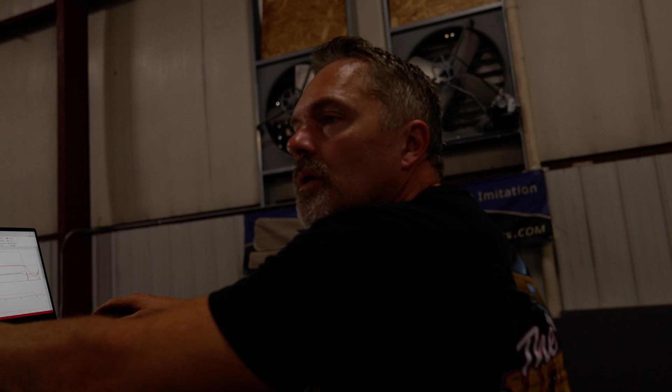So it just hit the three-step right there, looks like. What we're listening for too is a two-step and a three-step. Don't ask me why they name it that way, but the three-step comes before the two-step. You'd think it'd be like a one-step, but it's not - they call it a three-step. So we'll see where that's at.

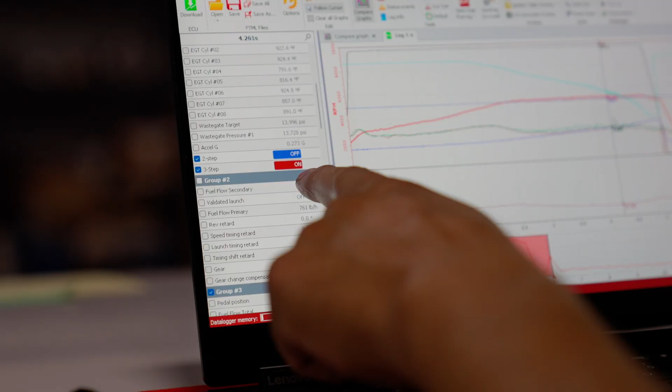Three-step - oh no, it had not turned off. Okay, had not turned off. Also kind of working on tune-up stuff here. So the three-step is on the whole time. Where is that at? Oh, that's all the way up here. And the two-step never came on. So the whole time it was there, it was on the three-step because it did not hit my three-step criteria to turn it to the two-step.

So currently it needs to go to 12 for here - I just wanted to test it at 12 psi on two-step. So two-step rev limiter is 4800 RPM. Two-step boost, two-step target is 12 psi. The three-step target is 14 psi. And we go over here, three-step enabled until 14 psi. So it never made 14 psi, so it never was getting there. Okay, but it did get really rich.

So let's see here, I think we'll go in. I'll just kind of work on this tune-up still, trying to get this thing better and better and better. It started going rich right here at the very end, so it's taking a whole bunch of timing out of it - in fact it's down to 0 degrees of timing right there. So it's going to start building boost faster, but it also threw probably a little too much fuel at it, and it got unhappy.

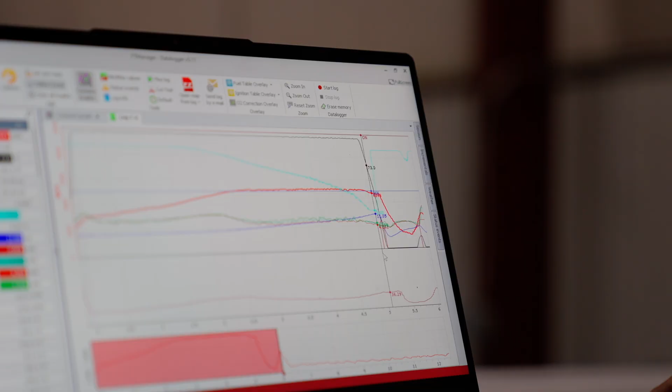So right in that range, I need to change my AFR. I'd like to get it back up into something a little leaner here, 4 or 5 or so. So I'm gonna go in there, make a couple changes, and then we'll come back - we're definitely gonna have to hit it again in the upcoming video, engine dyno for Raymond Hall.

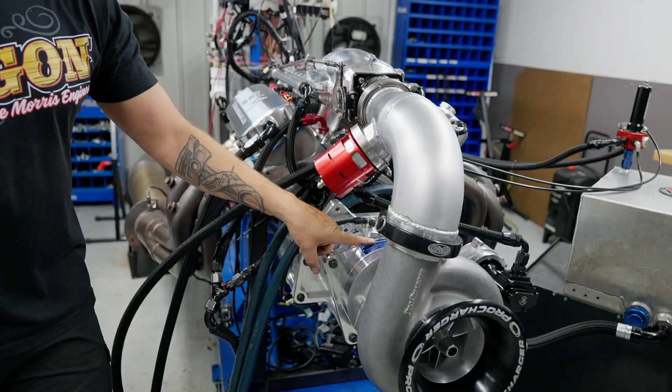Now this one was a little bit interesting - big block Chevrolet, methanol, F3136. Ray built this engine using some of our parts himself as a gasoline engine because he was going to make something a lot smaller apparently. So what he did is he sent us the long block back, brand new, fresh, never been run, to convert it into a bigger methanol engine. We'll go over more of that build and all the dyno results on this engine in the upcoming video.

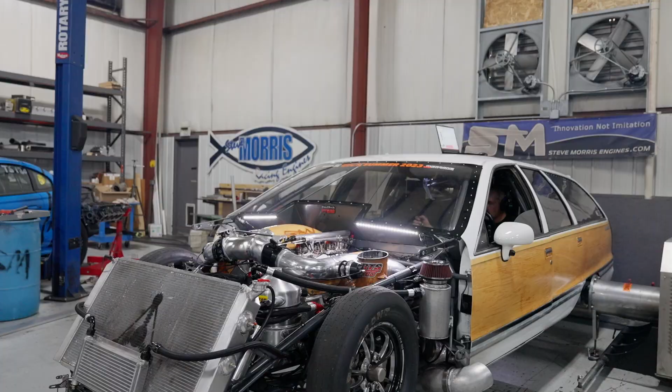Alright, that did not go as well as I was hoping. Something changed right there, and I gotta figure out what the heck is going on. It came off the three-step, and then when it hit the two-step, it actually just slowed down. It just started going backwards. So let's see what is happening there.

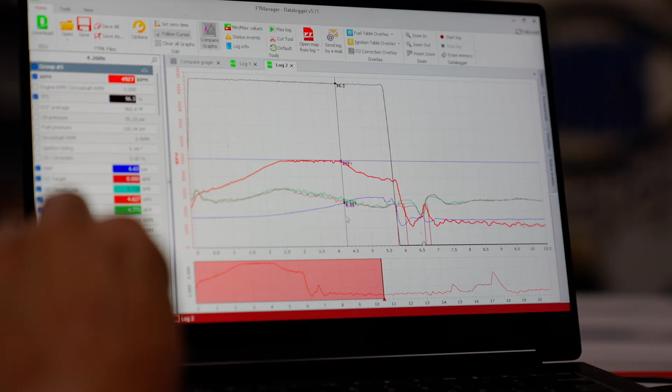Okay, so like I said, didn't go as I had planned. The same thing came up on two or three step - it was missing, or acting not normal. I got two things going on here. The primary thing is all of a sudden, as soon as it built - let me get rid of this stuff real quick - it built, as soon as it got up in the 7 pounds of boost, which is nothing, I don't think that has anything to do with it. All of a sudden, the engine RPM just started going backwards.

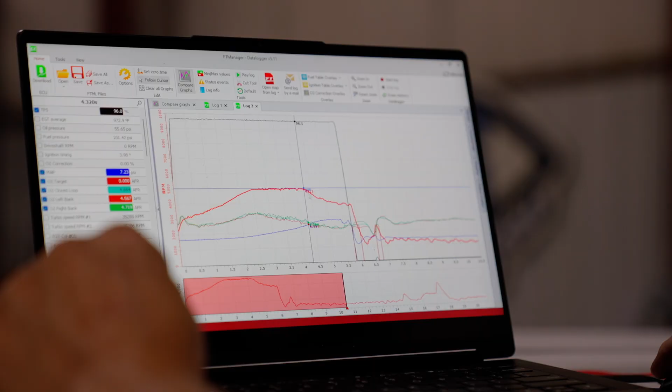The tune-up is looking correct. It continued to build a little bit of boost, but then all my EGTs look correct. I'm almost thinking that's the first thing - I'm wondering if it has done something in the converter that's all of a sudden it's just not right.

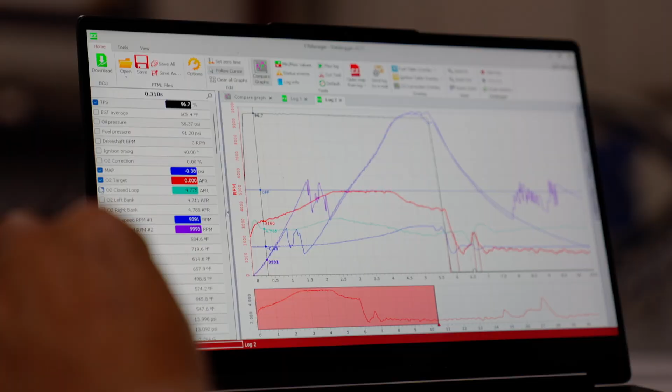Unfortunately, the only way we can test that is just by physically testing it. The second thing I see going on is that the turbos take off, and these lines here are the turbo speed sensors. Right here, this is boost. This flat line is where it just isn't building boost very fast at all.

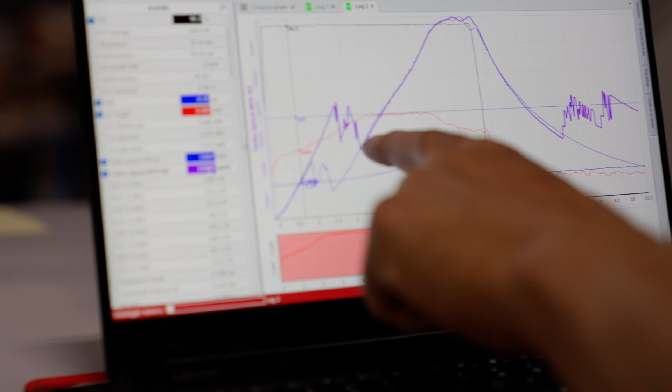Just not enough timing, huh? See how the speed sensors here, it actually takes off, then slows down, then takes back off again, and they run parallel with each other from the start to 1 second in, and then something happens where they get all angry. This one starts out, it stalls, comes back in way down there. This one stalls, does something, and they both catch up, and then they both take off again.

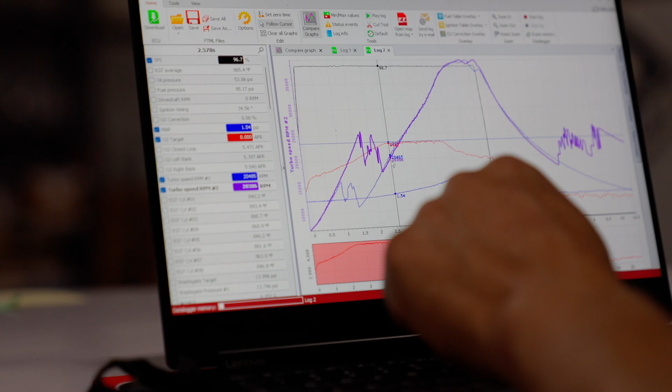I've seen that now just a few times, so I'm gonna have to start figuring out what's going on there. I'm gonna talk to Hartz and see if there's some kind of issue, and I think I'll probably run this one more time, change my tune-up just a little bit, and see if it repeats that or what's going on, and then might just end up having to pull that converter.

But that's what we test for. We're gonna test right here and see if it makes it past this, then see if it makes it past going through pulls, and then see if it goes down the track and everything stays intact and is right and correct. I'm gonna change some stuff around in my tune-up just a little bit and see if it does that all over again.

Alrighty, there it stayed on the rev limiter. So got up there decent. Didn't build any boost. This thing with the turbos dropping and coming back, I don't know what's going on there.

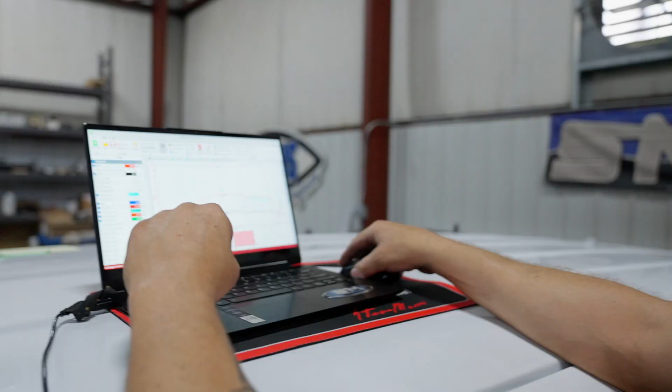So that was from the moment it hit the two-step. It was a little lazy getting to the two-step, about 2.5 seconds. But I think that's just because the air is really bad right now, and it was richer. But it jumped right up, and it was on the 3-step. So let me show you that 3-step. The 3-step is this red line way up here, and it turns off right here where the engine RPM goes down. So from the moment it hit the limiter in this area, basically 3 seconds, 2.5 to 3 seconds, it was only on the rev limiter for 1.5 seconds before it built full boost, and then it drops down in engine RPM to what I want my launch RPM to be, and then it just maintains there.

So that was all really good, actually. That's probably one of the best. Once it got to the 2-step and then made boost, that was the best time there. I'm going to work a little bit more on getting up to the rev limiter. I'd like it to be quicker than that, like 1.5 seconds or so. And then if it was 1.5 seconds and then 1.5 seconds, boy, that'd only be 3 seconds to full boost where I bump in. Right here, I would have bumped in at 4 seconds, and this probably would be a little bit quicker because this is stone cold for the morning.

So after burnout, transmission fluid's a little bit higher. It's not even 150 right now, so that's pretty good. I think we got that figured out. It was all a matter of figuring out the perfect timing and the perfect amount of fuel once it hits the rev limiter. I think I'm still rich going to the rev limiter, but once it's on the rev limiter, I think my AFR is correct. So I think we are

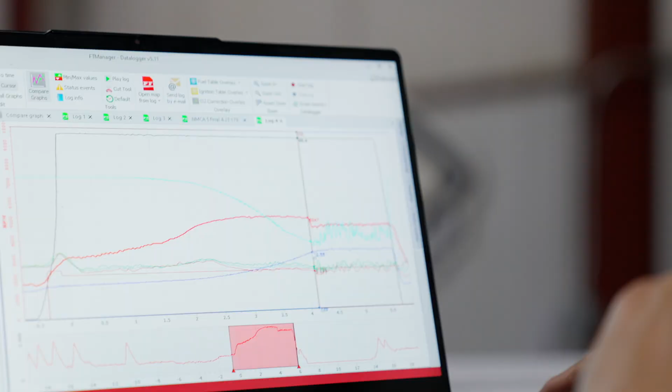Yeah, so we're pretty darn good right there. So 2-step accomplished, wasn't a converter issue going down. It's pretty interesting, this thing goes all the way down to 2 degrees of timing to start building boost, and that's good, except if it goes to 0 degrees of timing on this particular combination, this engine, and that's what I was dealing with yesterday, when it goes down to 0 degrees of timing to build exhaust temperature. If you don't understand what's going on there, sorry. If you do, I'm just going to explain this real quick.

So in order to get the turbos to spool, this is on pretty much any car at lower RPM, with great big turbos, you need to typically overgeneralize - add some fuel and take a whole bunch of timing out of it, because the less amount of timing you have under what the engine needs makes the exhaust very hot. Very hot exhaust flows very fast, and very fast hot exhaust moves turbos quicker. So you take timing out of it and add a little bit of fuel, and it makes the turbo spin faster, quicker. That's what we've done.

So it's just that magic spot, but for some reason this combination, when it hits 0 degrees of timing, the engine - whether it's making boost or not - just is so unhappy it starts losing engine RPM. But at 2 degrees of timing, it's fine. Kind of weird. So anyways, happy with that. I think that's actually fixed. I like that.

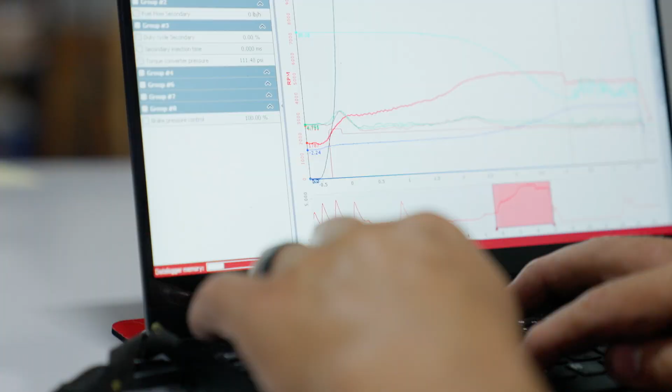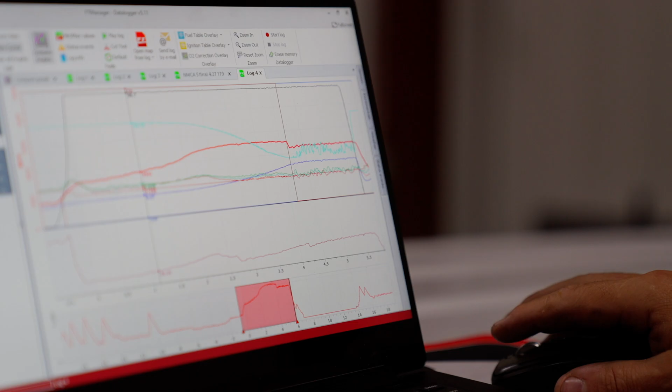Let's see. Ding. Yeah, so that all looks really good. Okay, so all our converter pressures, everything looks real good through there, and we met target, did everything it's supposed to. I'm happy. So I think we're gonna get the dyno all set up, and then we're gonna make a couple pulls and see what kind of power, slippage, everything that the converter's doing.

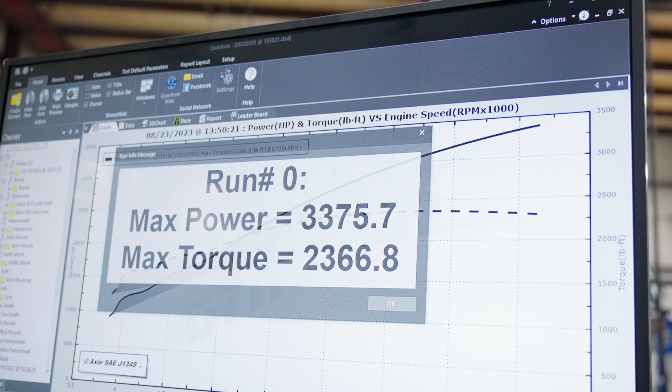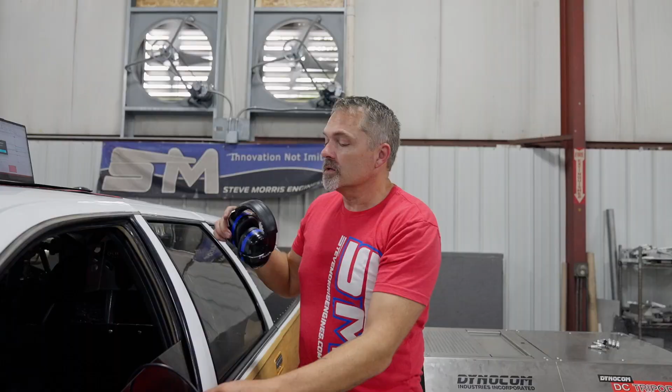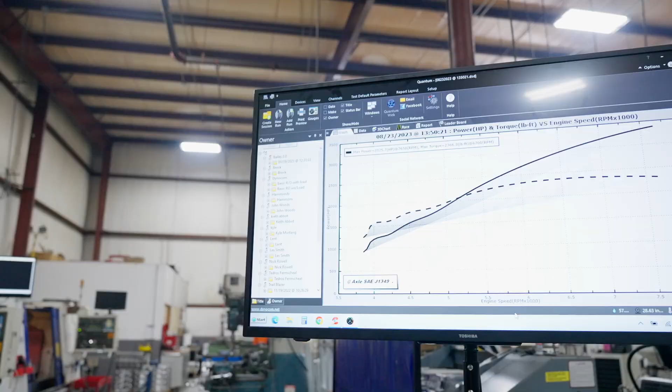Alrighty, that's pretty good for a first hit. We'll see, should have made probably 40 some odd pounds of boost right there. So we'll take a look at the data, but 30 - and actually I think that's on an SAE, everybody uses a STD scale. Not that kind of STD, the correct kind of STD. There you go, it's STD. And on a standard correction, it is 3491.

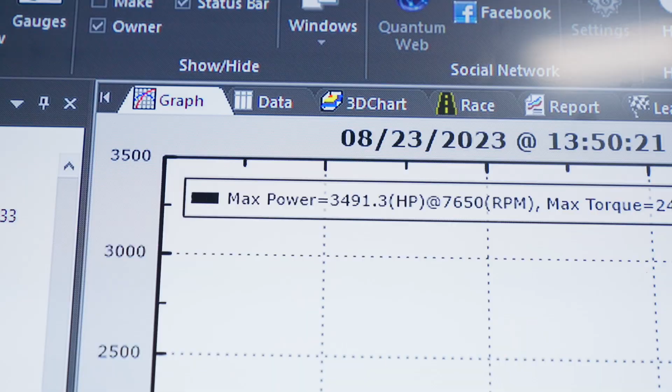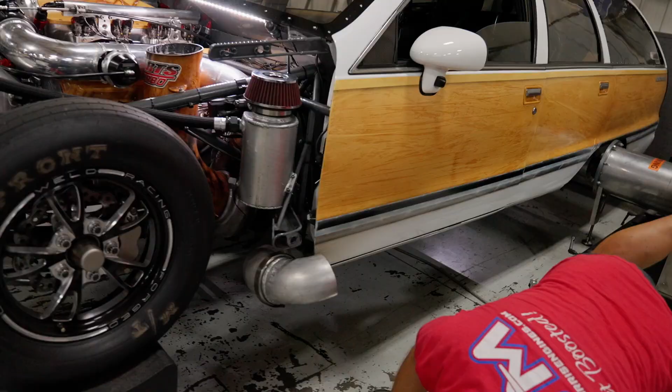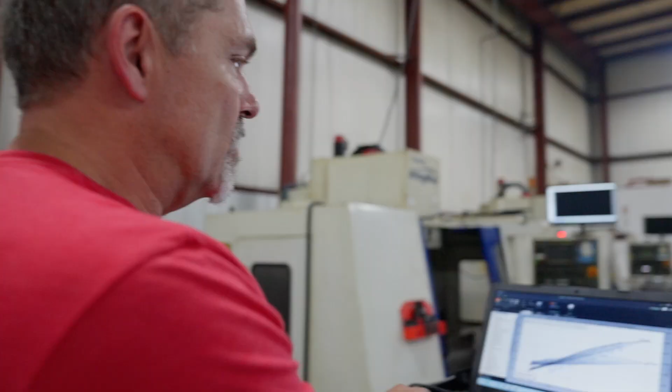We'll look at data here in just a second, but pretty happy with that. There it is. No converter parts hanging out the bottom. That looks good. Let's see, do our cursor. There we go. Yeah, I mean, still climbing. 3491, and our peak torque was 2447.

Now let's go over here, we'll look at the data here. Alrighty, pretty darn happy with that. That's actually the most I've ever made on this dyno. I think that is definitely looking pretty good.

All the mainline dynos all operate in a standard correction, STD, not a SAE, FYI. See if there's any other little acronyms I can come up with there. Is the acronym when you abbreviate something? Okay, yeah. Okay, so anyways, that is looking pretty good.

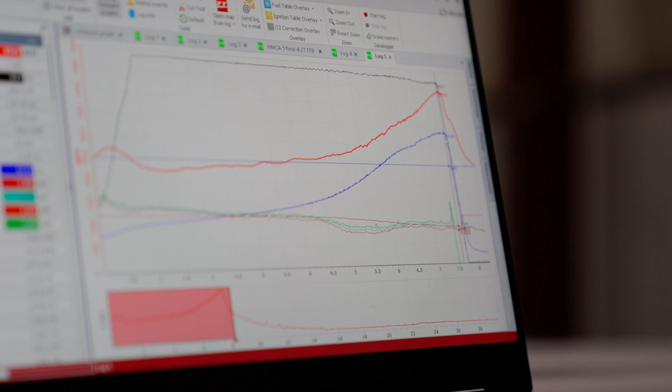It made 42 pounds of boost. You can see it right there, 42 pounds of boost at 8,900 RPM. So that was 9,000 RPM. 42 pounds of boost, that is right my normal spot that I run this thing at, and that was the drive shaft slippage right there. So the converter slippage was at 105.

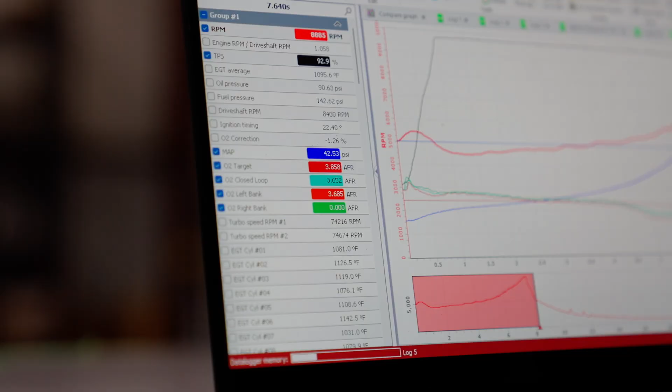1.05, so 5%, almost 6% slippage. And then given where that's at on hub dyno and how the hub dyno works, it would end up being a little tighter on track, because right there the dyno is hunkered down trying to load it really hard, harder than what the track actually probably does, because that was a 230 mile an hour wheel speed.

Yeah, that's a little bit slow. So I would figure at this particular combination at 9,000 RPM going through the traps should be a little closer to in between 235 and 240 mile an hour, probably closer to 240 mile an hour. So I think that the dyno is definitely loaded in harder, and that's actually what we want it to do.

We want to see what the converter is going to do, and I think that is really good. That's nice. I think everything is looking great there. My tune-up, of course, is spot on. I got a little spot right there, but it never runs right there, any of these areas that are in the 30 pounds of boost range.

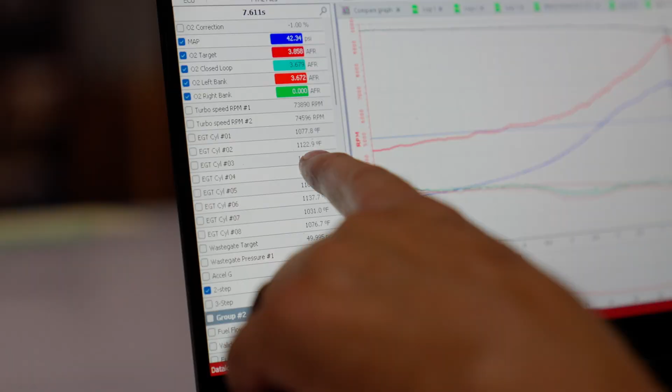So my O2 correction right there is 1%, 2%, 1%, basically 1%, 1%. My EGTs look really nice. 1077, 1122, 1120. Actually, those are really good.

And we figured out my EGT problem on my one side. New updated EGT-4 boxes from FuelTech. So that fixed that. Yeah, this thing is looking pretty good. So super happy with that.

And I don't know, I don't know. Let's put more fuel in it and turn it up. Let's see what it'll do.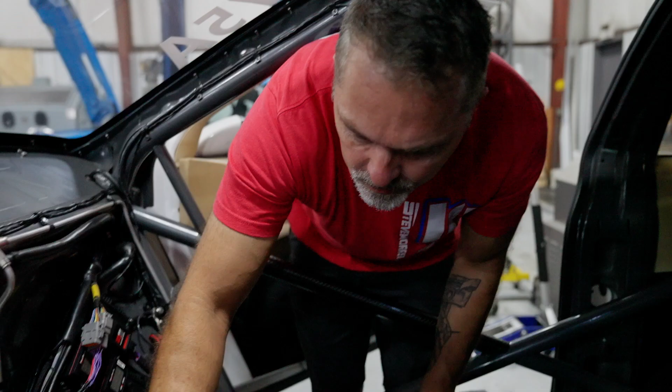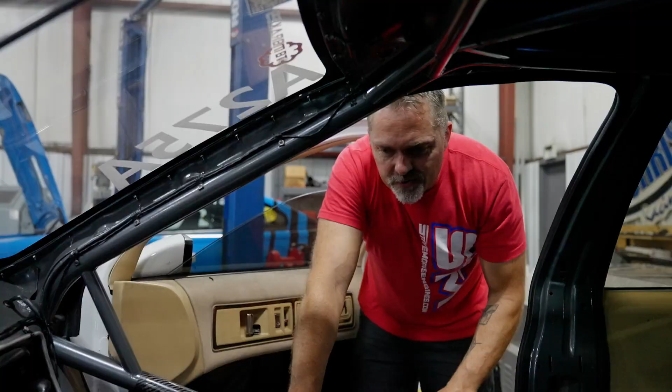Alright, so what I'm doing here in between, we're going to add fuel to this thing. And we're going to go ahead and run the exterior transmission cooler to cool the transmission off, get it back down to a nice normal rate. So what we're doing here is, because the transmission's built up heat, obviously, and we have that whole heat issue all figured out, which is great, which fixed a lot of stuff.

Then this prototype converter, which is looking really good. So we just want to get it back down to, like, get it down to 100 degrees, which is basically where it was at, a little more than 100 degrees when we made that pull, just so we can get back to a consistent setup. So we'll turn this on, get a little noisy, and we'll throw some fuel in it.

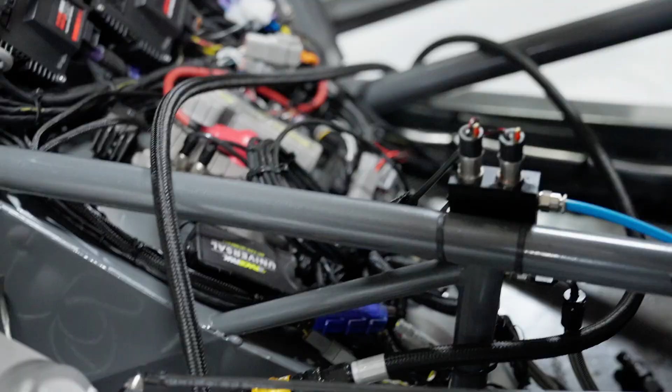Alrighty, transmission is cooled down. Just turn this off. It's back down to 100. There we go.

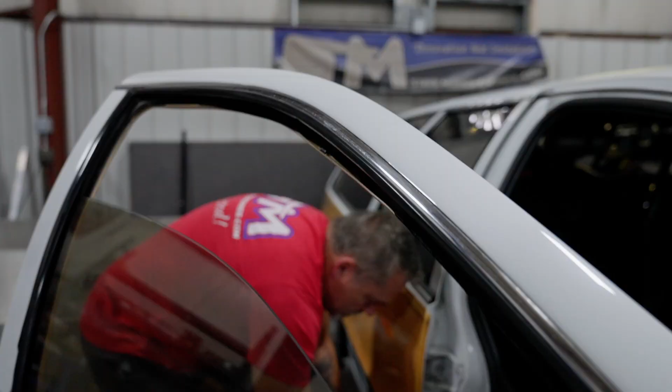All right, and then I started thinking, you know what? There's a lot of new people here that might not know exactly what this whole car is all about. So let me tell you.

Now, I've had this car on Fuel Tech's dyno. It made 3,200 something at 40 pounds of boost, a little different setup than what it is now. Long story short, I made 2,800 horsepower on this dyno, drove all the way down to Fuel Tech's dyno, put the exact same tune in it, and made 3,200 horsepower. Doesn't matter. So I know these numbers are pretty darn close.

They just had another one of my SMXs on Fuel Tech's dyno, Ned Dunphy's. They made 3,500 horsepower at 45 pounds of boost on Fuel Tech's dyno, same exact engine. So let me go over this engine.

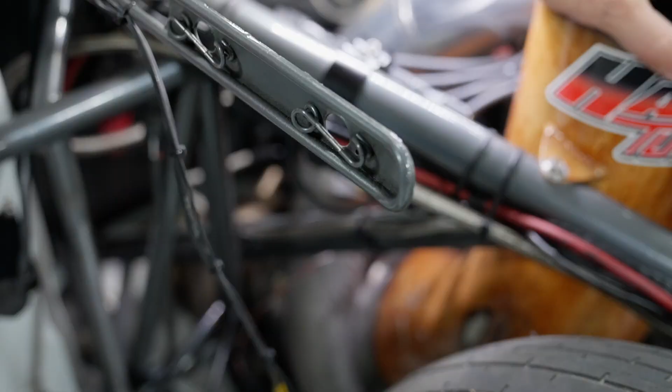This is my SMX engine. If you got any questions about SMX engines, lots of videos on this thing all over the place on my website, you can look it up pretty much anywhere. This particular engine is 540 cubic inch, 110 millimeter twin Hartz turbos on this particular application. So a lot of turbo, makes lots of horsepower, will make lots of boost.

At that 42 pounds of boost range right there, that is where this car was going 420s, which would be 630s, 640s in the quarter mile. This car, all steel, power windows up and down, cup holders for it. Drives everywhere, we drive this in drag and drive events.

So you just saw it made 3,500 horsepower, we just turned boost up. We'll make 50 pounds of boost, which is still a lower boost number for the combination. We will ultimately make in the 70 pounds of boost range, not really going to bother doing it here because I really don't care. We'll see what it does at 50 pounds of boost, because that's going to be, I think, my magic number to probably go 14s, 620s, right around there, 235, 240 mile an hour in a quarter.

Let's see what else. Oh, did I say what the car weighed?

3,685 pounds is what this car weighs. So about 3,700 pounds. It does have the big tires over there because it's on the hub dyno here, so 36-inch tall tires.

If you haven't seen the rear end in this car, go back, this is a good link about it. Put the link of the rear end in there. That's awesome, lots of history on this car.

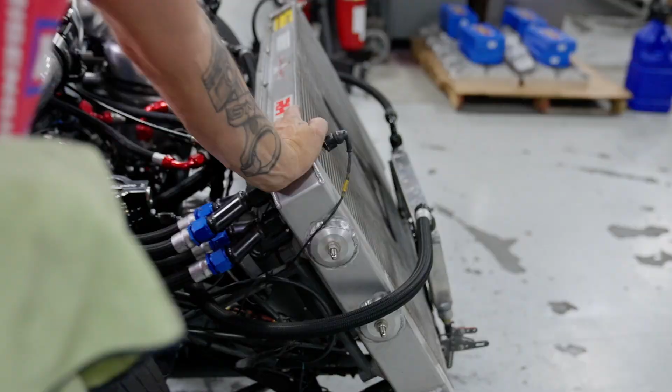You can see here the whole drag and drive part of it, the world's biggest radiator pretty much. So radiator cooling, oil cooling, transmission cooling. That's still really cool, just surprising. Yeah, no temperature in the oil yet.

But that was the first pull. And so anyways, oh, and drag and drive, so I'll show you right after we probably make this pull, because I'm going to convert it back to gas, regular pump gas. And then I'm going to work on the pump gas tune just a little bit on the dyno.

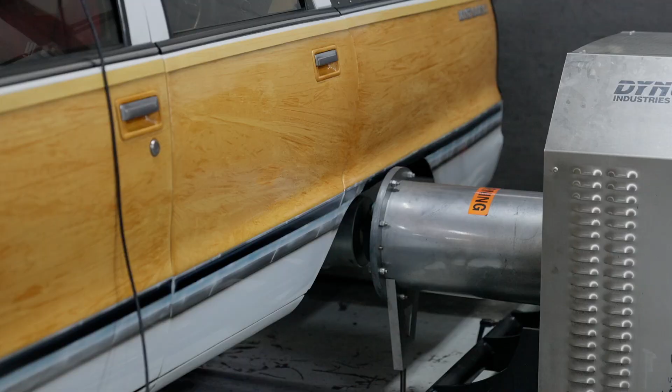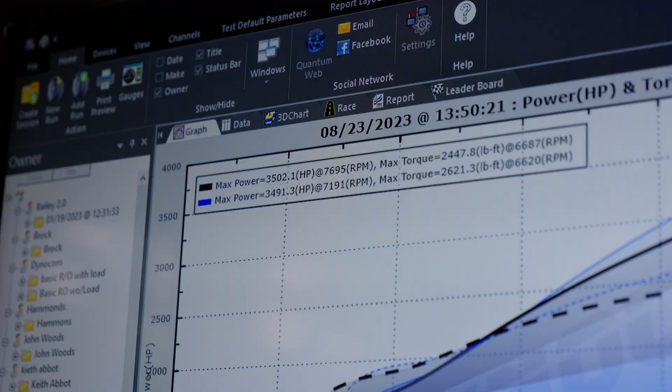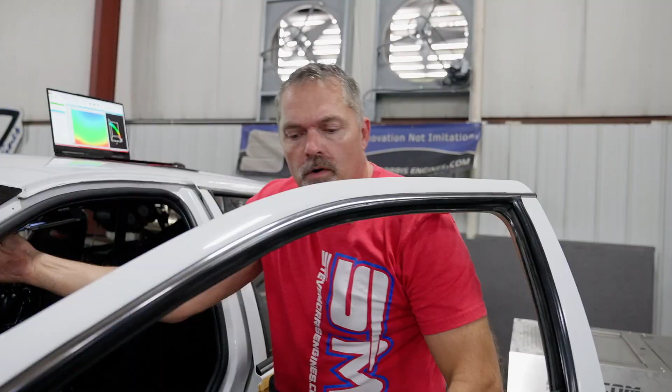Hit the rev limiter right there, and kind of laid over. So it kind of laid over, it was making more horsepower. You see the old previous line there on the dyno.

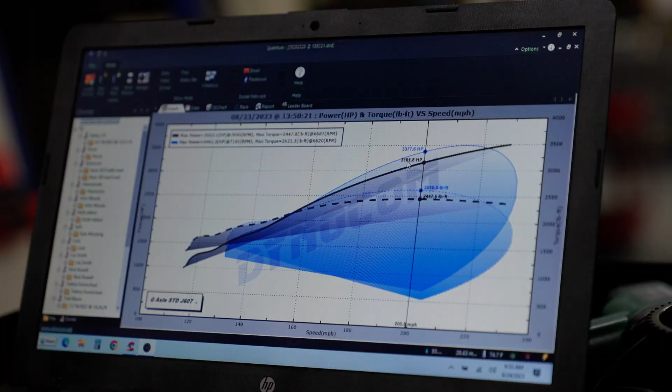So this is the previous mark. Right here, yeah, it was 200 horsepower higher right there, and then it only made the same amount of horsepower because it laid over right here. So let's go see why it laid over, because it made 200 more foot-pounds of torque.

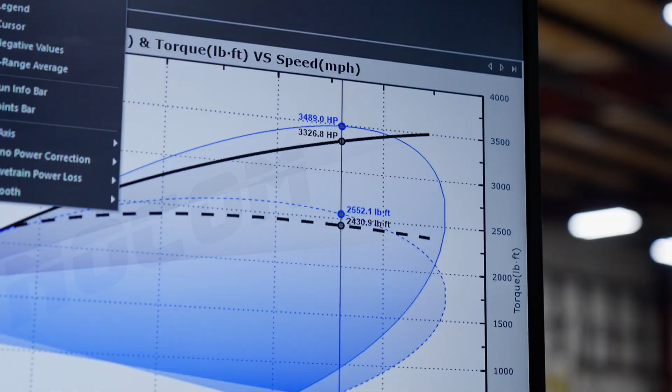That's the light blue line right through there, light blue line. Let's download our data log and see. I think it should have made, pretty obvious it should have made, like 3,800 horsepower. Let's see what she did.

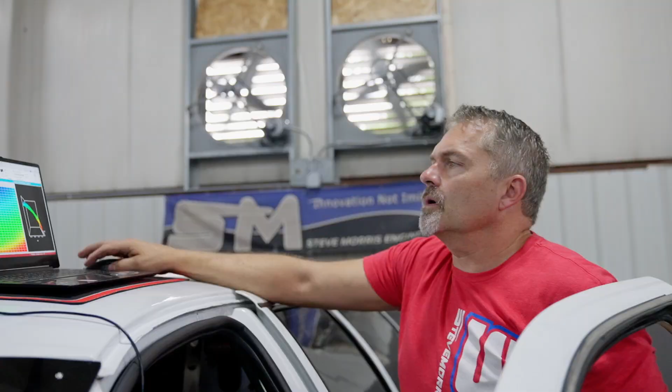And then the other thing I think I'll do, so now, like I said, this is the most amount of horsepower we've actually run through this hub dyno. And while this is uploading the log, let's look at something here real quick.

We'll see here, because one thing that I do notice, we'll see why it came up on the rev limiter right there and fell off. Maybe a good possibility, not sure, but if you look at this number right here, so this is the load that it's applying, and as it speeds up, we're already at 100% loading.

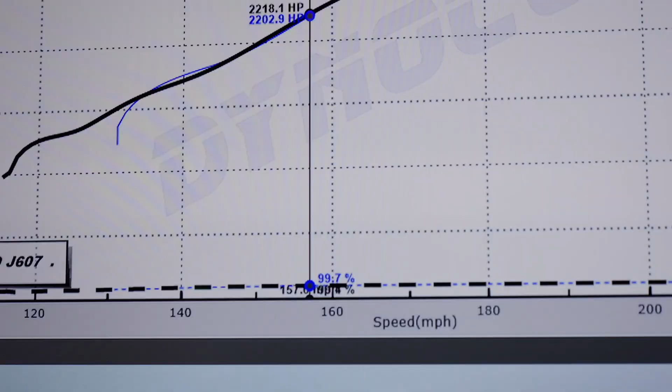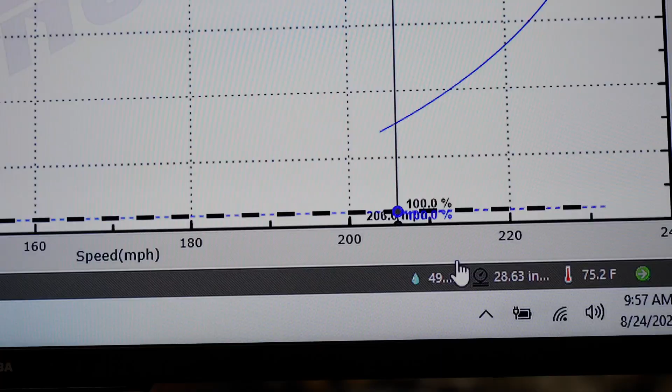Now as it speeds up, the absorbers get more and more efficient, but I'm almost wondering if we started exceeding the absorber, because it can only give it 100%. I mean, 100% is 100%, and if it's not controlling it anymore, so that is maybe a possibility.

Let's look at the tune-up here, see where we're at. Oh yeah, it just flat out hit the rev limiter. Of course, must have just tickled it, yeah. So it hit the rev limiter faster. You know what, it's probably, now that I'm thinking about it, it probably is not the dyno.

I think I have my rev limiter set at, let's see where it's at, it must be at 9,000. Yes, rev limiter 9,000 RPM. So you know what, it hit the rev limiter, it just hit the rev limiter earlier, and that's why the horsepower goes whoa, because it's on the rev limiter. So, well, I guess I just have to turn it up. All right, let's go 9,500.

Which for the engine isn't really that big a deal, but let me think here. So that is 95. Yep. All right, so it was following everything.

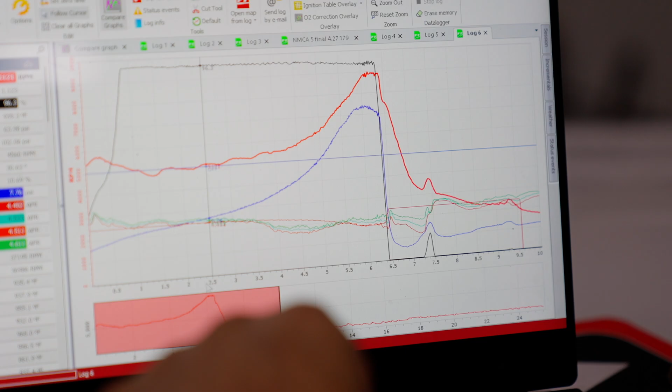I'll go back to this graph here for you, and you'll be able to see this. Right here, it's on the rev limiter. That's why you see this little, all of a sudden it just goes beep beep beep beep, and it just happened to be, I let go, or I stopped it right at 9,000 on that first pull. It probably just ticked the rev limiter, and I didn't even notice it and forgot all about it.

So what that does is it only made 47 pounds of boost, because as soon as it made 47 pounds of boost, it hit the rev limiter and was unhappy camper.

All right, and then so yeah, I think we're gonna have to get that corrected so we can get our correct slippage out of this torque converter, because we were slipping a little bit more right there. So we were at like 107, so 7% slippage from basically 5.8 or almost 6 to now 7. So it picked up a percentage of slippage, which kind of makes sense. It is loading hard, it's throwing all the load it's got at it, and that was right before the rev limiter, so it wasn't done accelerating. So it's really driving hard through there.

So we will go cool the transmission down again, because I want to get everything consistent. We'll cool the engine, cool the transmission back down into that 100 range, just like I would normally, and we'll make another pull. But like I said, you can really see where it does that. It comes right up on the rev limiter, flattens out. Once it does that, makes the boost all angry, of course, which is the way it should be.

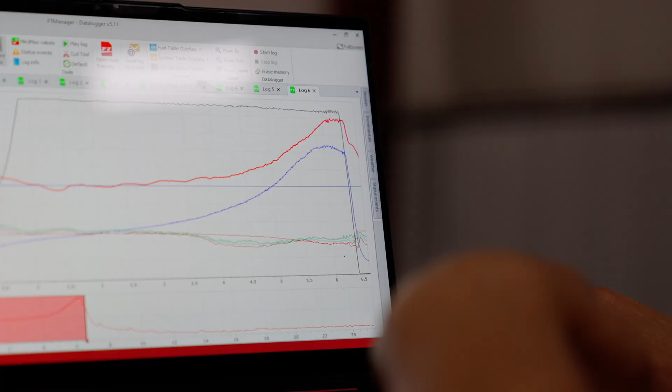And then you have, let's see where our EGTs are. So all our EGTs are still looking good. 7 cooled down, but I bet you that is blown out of the pocket a little bit. One of the EGTs is loose, so I'm not worried about that. My O2 is looking really good. Corrections are really nice, still 1%, 2%, 3%, 4 or 5. Yep, 5% most. Okay, so we'll come back in here and let's hit this thing.

So I'll just turn the rev limiter up and let her eat the same way, but let's cool everything down.

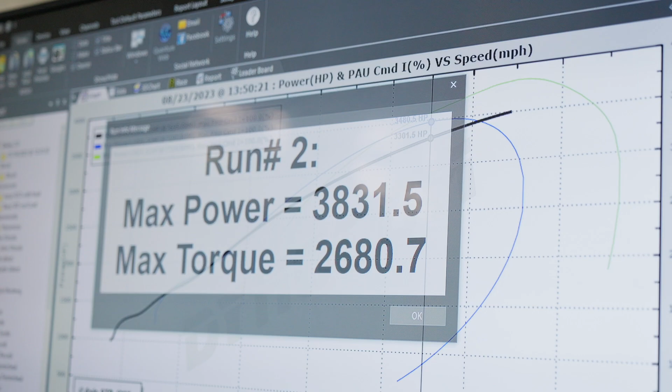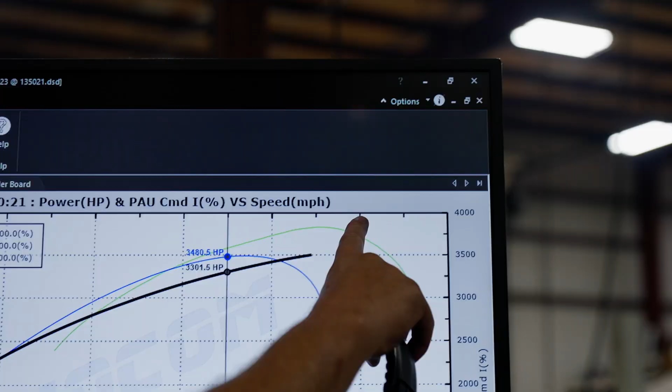Pretty happy with that. I actually pulled out of it just a tick short. I probably should have let it hit the rev limiter, but I pulled out a little short, and that's why it laid over right there. I think it still would have carried out at 9,500 RPM and probably made close to 3,900 horsepower.

So you guys probably think, oh man, just keep turning it up, make 4,000 horsepower. I could. I don't know, I'll think about it. All right, check that.

Louis DeLeon from Fuel Tech would never forgive me if I didn't try to make 4,000 horsepower. When I was there, if you ever watched that video when we had this car on the dyno at Fuel Tech, Louis is like a little eager kid. He's like, yeah, turn it up, yeah, add more boost. He's super eager, of course he doesn't have to fix it if anything happens. He's like, oh, let's put 70 at it, yeah. Well, it broke the transmission on their dyno, so we never had to do it, and he never had to tell him no, I wouldn't do it.

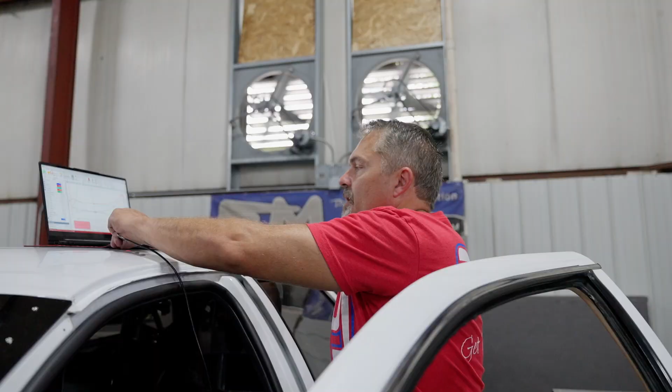So anyways, turned it up, we're gonna try to make 4,000 horsepower. But for right now, let's look at the numbers. That would be that little tune-up right there. We'll look at it with a data logger here and see where it is for boost and everything. That's probably more boost, more power than this thing's ever had going down the track yet.

So I kind of like to run it right there. I mean, we can always... people are right, dyno numbers really don't mean anything. All I'm really doing is pre-testing this converter so we can get some good information on it. You can hear it's accelerating pretty fast up through there, so the dyno isn't really loading it as much as it could. It's not slowing it down to the rate it's supposed to, so it's driving through it. So just continuing to add more and more horsepower is really just going to accent that problem.

So yeah, I pulled back. It was 9,200 RPM on that pull right there, and that was at 48 — it's spiked up right there at 48. Yeah, 48, 49 pounds of boost, almost 50. So that would be definitely very close to where we're... well, that is more boost than we've ever run in this combination before. So 50 pounds of boost is where I want to be at.

Yeah, 50 pounds of boost is where I really want to be at for the entry level deal — entry level meaning I'm working on this whole base tune-up that just goes down the track and does anything. If I want this car to go 630s, 640s, anywhere — no prep, all prep, radial prep, any kind of prep — go 630s, 640s all the time, I think that right there is a tune-up that would do that, plus probably be a little closer to 620s, 630s in the quarter mile. So that's pretty good, I'm happy right there, that's a nice, easy, safe spot, and horsepower's no big deal. The engine really doesn't care if it's got 50 pounds of boost in it or not, doesn't give a crap.

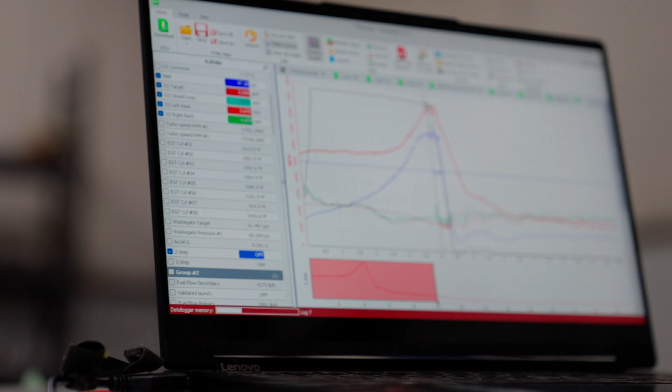Because this thing will easily make 70,000 or 70 psi. Let me show you something else that's a little interesting. My EGTs all look good. The EGT is loose on my number 7 — it pushed it up, and looks like it pushed it up on this one too. So it all starts out the same, then all of a sudden it starts reading a little colder. No big deal. Everybody's looking the same here — 971, 1000, 1010, 1060, and these are all within 50 degrees. That one's maybe 50 degrees hot, and that's number 7, which is a little cold, but I'll guarantee it's pushed up. It's hard to see in there, but it's pushed up because the ferrule's not tight. No big deal there.

Tune-up looks great. Okay, still in that 1.56 correction factor right there, sorry if my finger's blocking it. 48.9, so almost — just a little spike right there, but pretty much in that 47 to 48 and a half range, something like that. We'll call it 50, good enough. Let's see, so that looks good. And let's see, where is my converter at?

105, 104, 104.7. So about 4.5% slippage. That's pretty good. I'm gonna give all that information to Marty, and I think the next step is to test it at the track just like it is. Everything's looking good. We got another 20 plus pounds of boost to go.

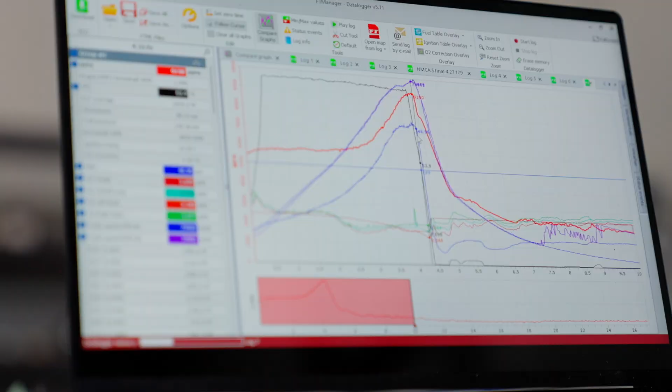I was gonna show you turbo speed, because we do measure turbo speed. So here is our turbo speed. Turbo speed was 79,000 RPM, almost 80. 79,951, 79,469. So almost 80,000 RPM turbo speed. And from what they tell me, that's nothing. So I don't know what the max speed on that is.

I'm waiting for Roger to call me back, Roger at Hearts Turbo. Give me a call back and let me know some of that turbo info. But right there, that thing is pretty freaking sweet. I know that there's a lot more left to go.

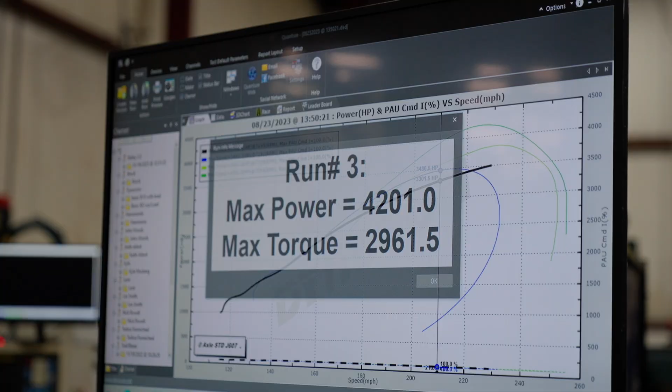You can hear this dyno just is not going to load it any harder, and it ran up and hit the rev limiter. So that's the rev limiter at 9,500, and that's why it lays over up there, because she's still climbing. Yeah, it is what it is. That is 4,200 horsepower at the wheel.

Okay, let's look at data. See how many pounds of boost that was. It's probably 50. Oh, probably was pretty close to 50. Well, it was probably pretty close to 60, to tell you the truth. 50 -- yeah, probably pretty close to 60. And like I said, that's where it just starts sweeping so fast through there, and then it hits the rev limiter. But if it would have maintained out there...

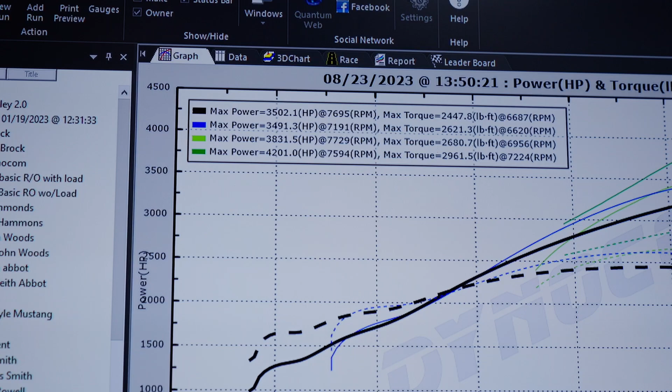It was on its way to 4,500 horsepower, but if I could just extrapolate it out, it is what it is. So let's go here, let's look -- we'll download the log. 4,200 horsepower at 2,000... what did it make? The torque -- oh, I got the torque off there. Hold on. 2,961 foot-pounds of torque. Alright, that was at...

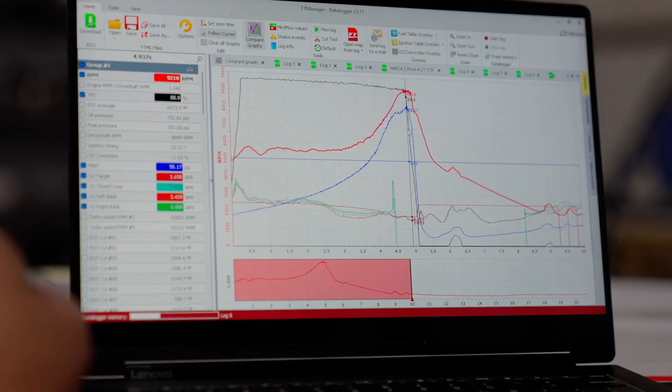Yeah, it did just tickle up the rev limiter up there at the very end. Oh no, that's pretty good. That's 55 pounds of boost. 55 pounds of boost, 4,200 horsepower.

Real quick, I'm going to show you how I convert this to pump gas, and then I'm just going to load it and do like some 50, 70 mile an hour test, or tuning. I know FuelTech actually made a pull on 93 octane fuel on Ned Dunphy's car, and at 3 pounds of boost, 93 octane, it made 1,000 something -- 1,011, or maybe 1,100 something at the hubs, at 3 pounds of boost.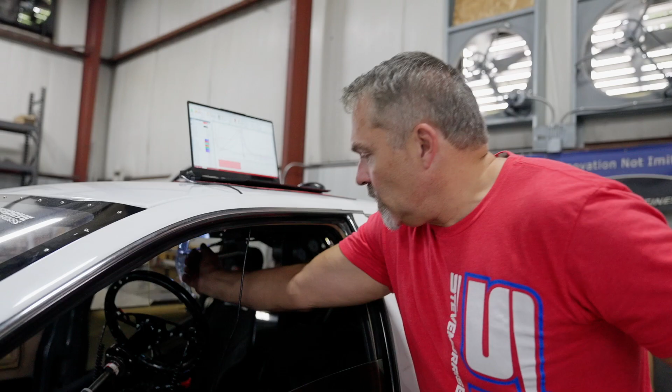SMX engine, obviously. So anyways, I'm gonna put this on the pump gas. I'll show you how that all works -- it's a pretty simple thing, I'll show you here. Number 2 button is lit up because that's my dyno tune. I'll change that. Number 3 is my race tune, number 1 is my street tune. So I literally push that button, make a couple changes in the fuel lines up front, driving. So we'll work on that little pump gas tune. I'll show you how that works.

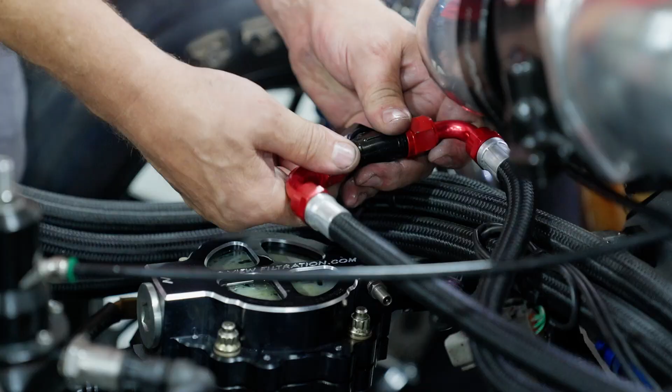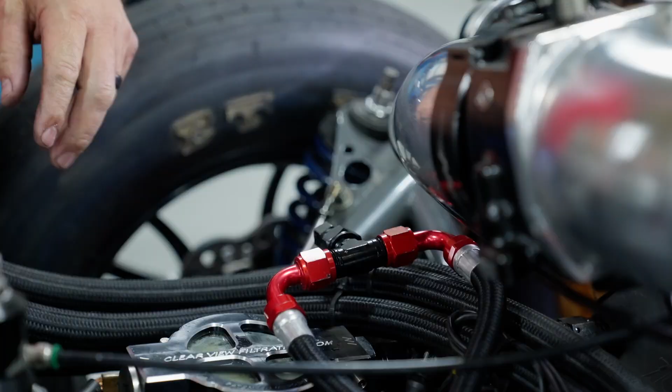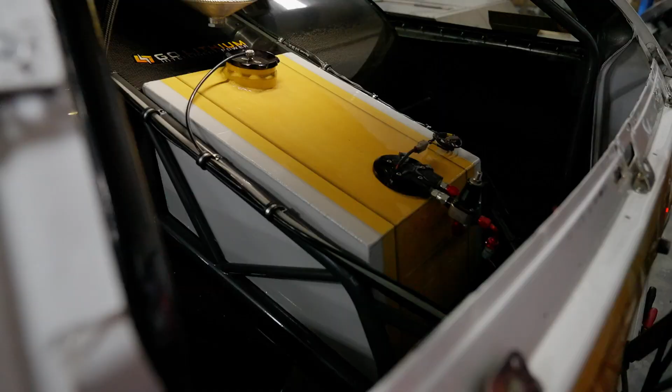Alright, now, outside of me using the improper tool for the job because I'm too lazy to walk over and get my Allen wrench, take the drive spud out of the mechanical fuel pump. I hook up, disconnect the race line pump and everything here. Hook up my back fuel cell tank. Back here in the back of the car is my drive fuel cell right here. So this is the pump gas fuel cell in the back of the car. All self-contained, just has one line, bypasses all back here.

That's it. Sometimes we might change the spark plug to a hotter plug if we're doing a bunch of cruising. But this will be -- I'm gonna start it up, run, like I said, just putt around on my pump gas tune. Just push the button for a tune, start it up, do a little bit of tune work, and this thing's ready to make 4,200 horsepower and then drive on a cruise to the local car show.

That's pretty cool. Alright, man, we are all done. This thing's running awesome, super happy with it.